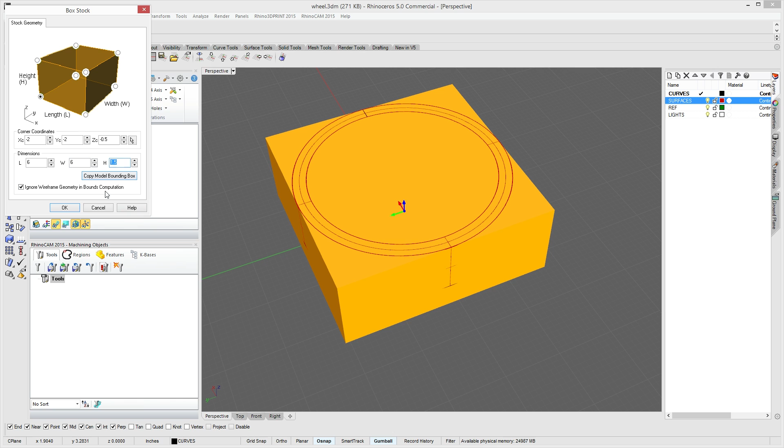So we'll let it go ahead and pick the 0 coordinate. But we're going to set our dimensions. We're going to add an inch on all sides. So we set this to 6, and we're going to add 6 here as well. And our height, since we want to make sure we do some facing operations, we're going to set this to 2 as well. So if I go ahead and hit OK, turn my stock back on, and you can see that it's significantly bigger than the part. But we can go ahead and fix that.

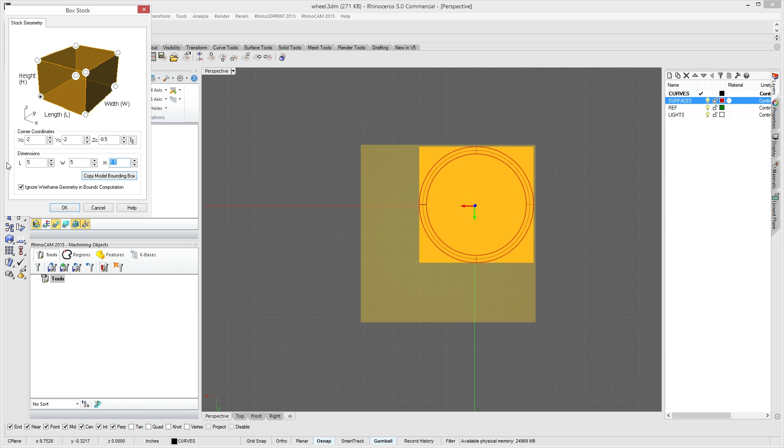Come back in here to stock. Copy model bounding box gets us back down to 4 there. And let's go ahead and just change this to 5, 5, and 2. And you can see that gives us a little bit smaller. That way we don't need as much big stock in the real world. You wouldn't waste that much stock for a part like this.

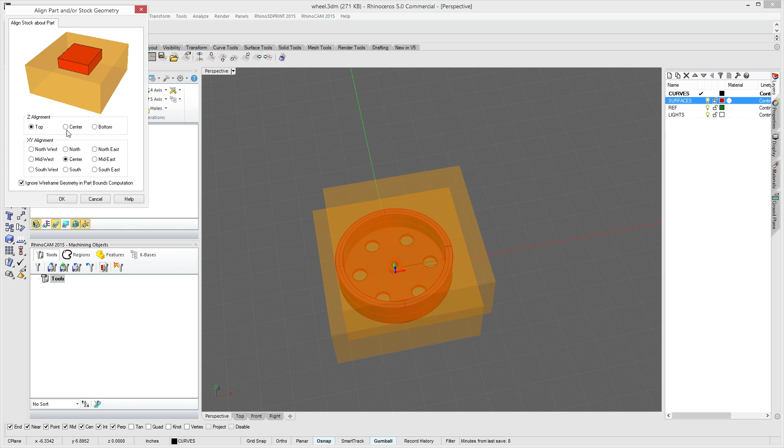So let's go ahead and align them. I'm going to go up here to align stock. And our Z alignment is going to be centered. And you can see this in here that we want it centered. That way our part is sitting right in the middle in our Z. And our XY is also going to be centered as well. So let's go ahead and hit OK. And you can see that looks pretty good with an even distribution around the outside as well as vertically.

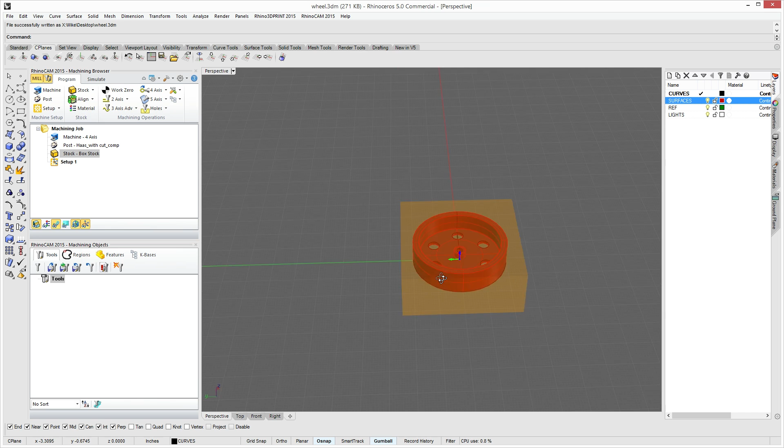Next, we want to align our stock to our 0. And in my vise, typically I zero top left right up here. Obviously your hard jaw's on the back, and I always do that left corner there for whatever reason. So let's go ahead and set our world. We're going to do set to stock box.

And what we're going to do now for our Z is we're going to set lowest Z. That way I can go ahead in the machine, touch off on the bottom of the vise, add the value of the parallels to it, and when we flip it, we have the exact same Z as well. So I'm going to set this to lowest Z, and it's already set to northwest, which is correct. So we're going to hit OK. Moves everything kind of to where it needs to be. Cool.

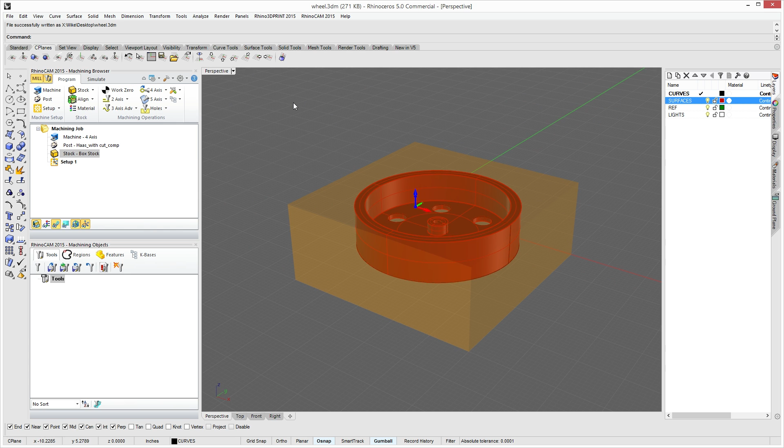So first, I like to kind of keep things organized, so I'm going to go ahead and change the setup here to op1. I'll put dash top because that is going to be our top operation here. So first thing I want to do is face the block down all the way down to this circle here. And we're going to leave it a little strong because we want the part to drop out. So we're going to face only what we need.

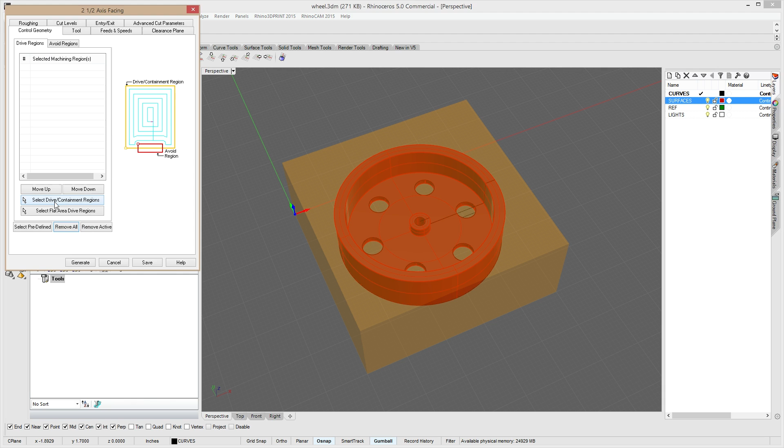So let's go ahead and do 2 axis. And we're going to do facing. We're going to select our drive containment region. I'm going to pick this outer ring right here, that poly surface edge, and right click.

For the tool, let's go ahead and create a tool. We're going to do an end mill, and we're going to do it with a 5/8 inch end mill. Set our diameter.

For all intensive purposes right now this doesn't matter, but we'll go ahead and put some information in here as well, and we'll leave it at tool number 1. We're going to work with aluminum right now, so I'm going to use my 3-flute end mills, turn my coolant on, jump over to feeds and speeds, load from file, change this to aluminum 6061, carbide end mill.

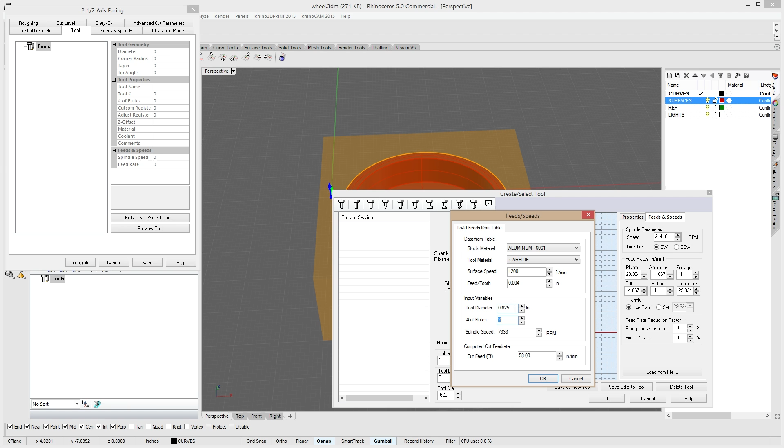Surface speed is usually pretty generous in the defaults, so I'm going to drop this down to 1200, and we're going to leave the feed per tooth at 4 thousandths right now. Make sure we change our tool diameter and our flutes. We're going to go ahead and leave everything else the same. Save as new tool.

Feeds and speeds, make sure everything looks good. Clearance plane looks good. All right, roughing. We're going to go ahead and leave tolerance and stock alone because we're just facing. Tool diameter, we're going to change this to 50%.

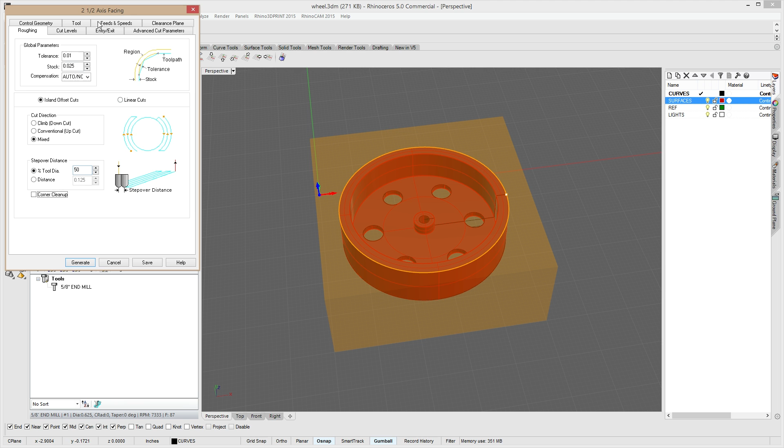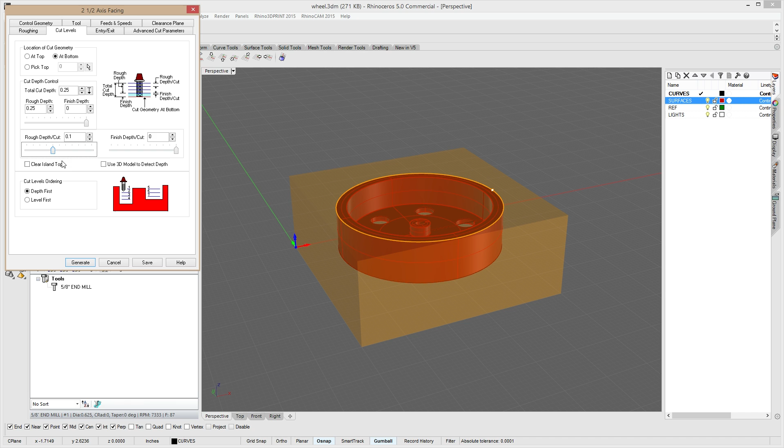Cut levels: since this circle is at the bottom of where we want to be, we're going to change this to bottom. And because we have a 1/4 inch on top and on bottom, we're going to set our total cut depth to 1/4 inch here. And we're going to do a rough depth per cut of, let's do 75 thousandths so we can see this pretty well.

Entry exit, we're going to do along path and nothing on the exit. Advanced cut, we're going to turn on our arc fitting with a 2 tolerance fitting and some smooth connectors.

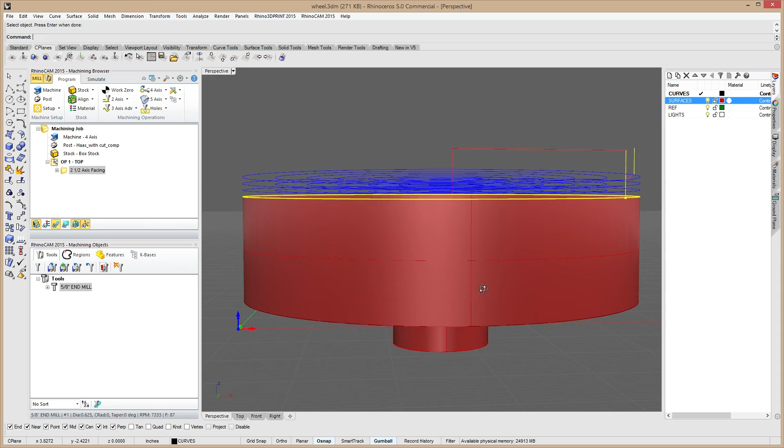Let's hit generate. You can see it went in and it's going to face all this off in the middle here. As you can see, the entry right there is going to come down nicely into the part. So if we go ahead and simulate this, you can see what it'll look like.

There's not a whole lot to take off at each pass, so we can speed this up. And it's going to take it down exactly where we need it to go in about 5 steps—4 steps, it looks like. So cool.

All right, back at it here. I'm going to turn off the tool path for now so we can see a little better. The next thing we're going to do is go ahead and pocket out this inside here, removing all the material from there. So we're going to do now 2 1/2 axis pocketing.

Select. I'm going to click that, the inside surface edge there, to give us that ring. And actually, we're going to do this a little different—let's select the top one here, since we know we've already faced down to there.

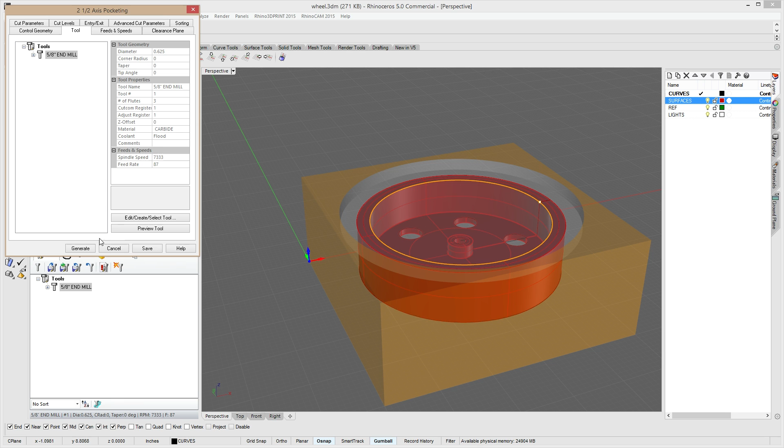Right click, tool. I'm going to do it again with our 5/8 end mill. Oops, I jumped through to feeds and speeds. That's good. Clearance is good. Cut parameters—now is where we want to get a little more

tighter. We're not going to do any finishing, so we're going to leave 0 stock. When I leave 0 stock, I want to make sure my tolerance is 1/1000th. And we're going to do 50% step over again.

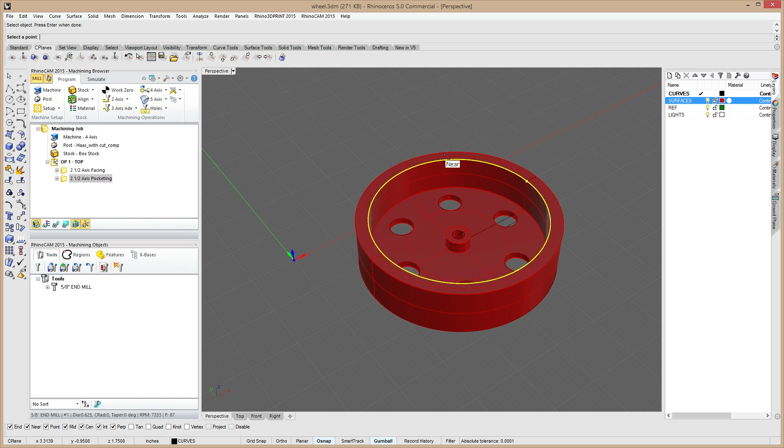Our cut levels now: cut levels, this line is at the top. So our depth control, I'm going to go ahead and select this, pick a point on the top circle, on the bottom circle, and it gives us 3/4 of an inch depth, which is correct. And our rough depth per cut, we're going to do about, again, 75 thousandths per cut.

Entry, this time we're going to helix in. Advanced cut, we're going to make sure we turn on our arc fitting and smooth cut connectors, and we don't need to worry about sorting for right now.

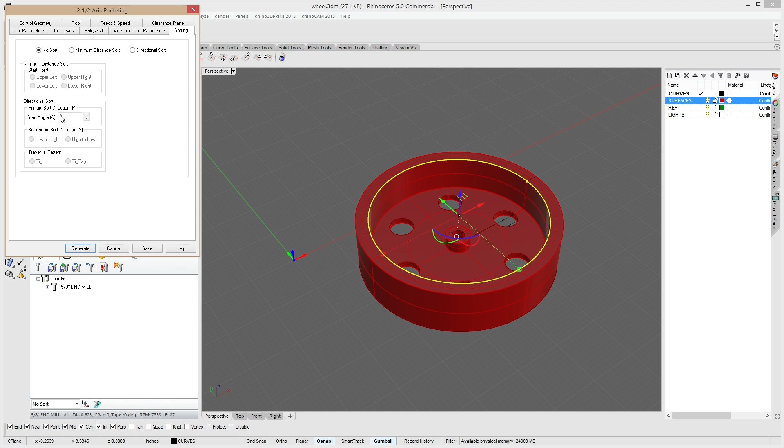So if we generate and take a look at the tool path, it looks pretty good, except it's going to take that nub right off in the middle.

What we did was we forgot to select that line in there as well. So let's go ahead and go back into here, and under drive region, I'm going to choose that line as well.

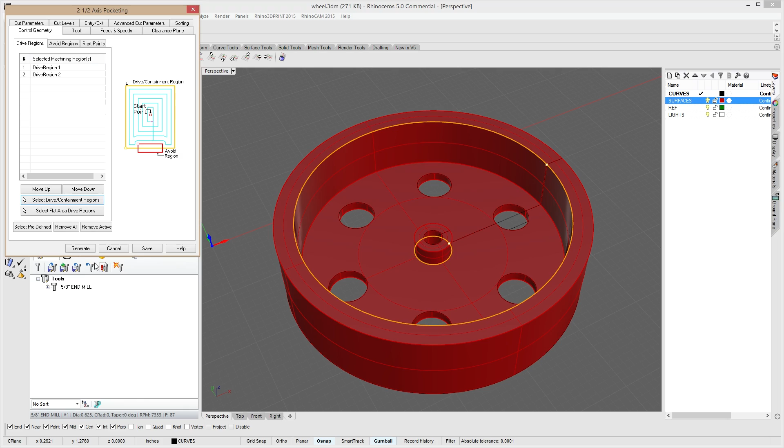See, now it picked all of them. So let's remove all, select that, and select that line. Generate. Oh, still having a problem. The reason is they're on two different Z levels right here.

So we have two options. We can come in and put an avoid there, but since we're using this top surface, probably the easiest way is to do a quick dupe edge for duplicate edge. I'm going to select that edge, right click, and that gives me a curve for that edge. And what I'm going to do is drag it straight up to the same level as that top line.

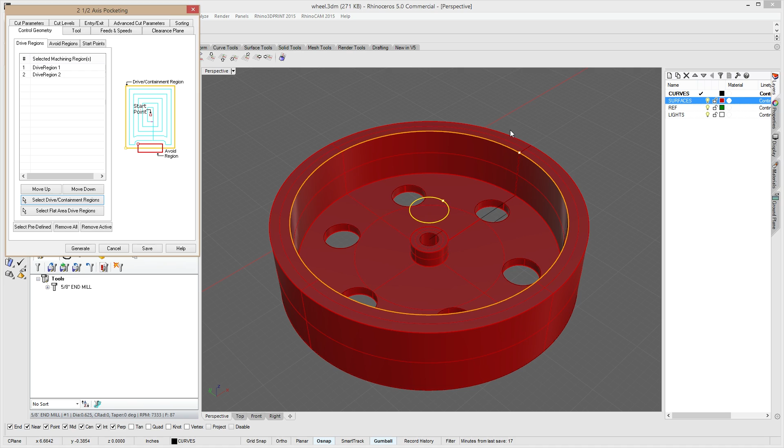Let's go back in and remove all. We're going to select both that edge and this curve, now that they're on the same plane, and generate. And now, perfect. Goes right around that area. So let's see what that looks like in the simulation.

That looks pretty good, other than it's not as close as we want it to be in the center there, and the reason being is our step over tool size. So if we come back in, cut parameters, clean corners, generate, it should come in and do a clean corner operation on that as well.

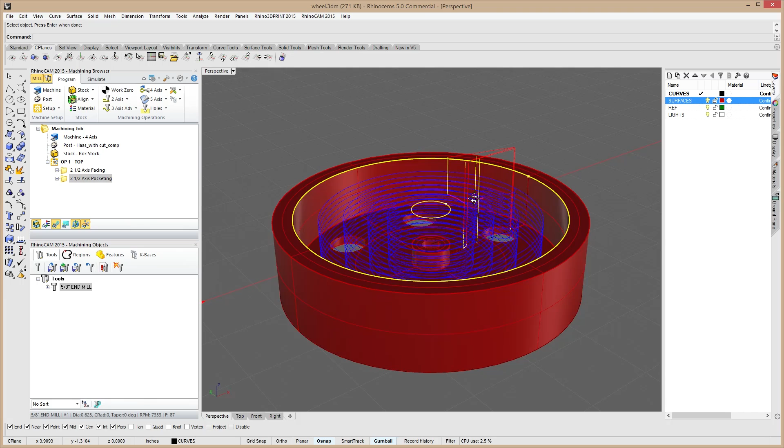Let's go ahead and simulate through it. There we go, got that nice small circle in the middle where we want it to. Cool, so that's looking pretty good.

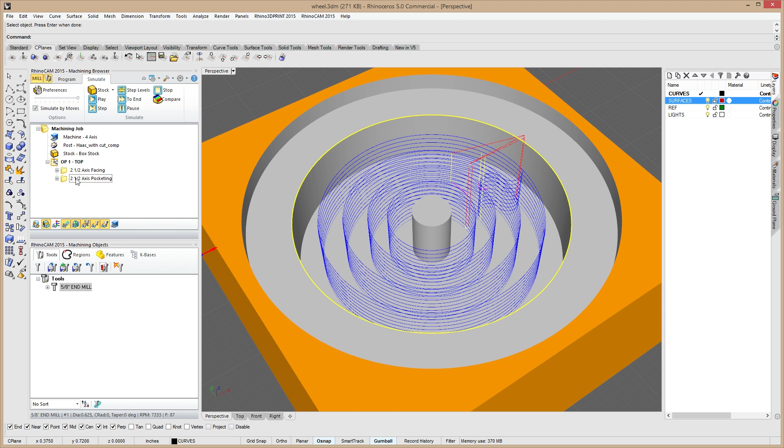Now, next thing we're going to do is face down the pocketing for right there, and that'll be a quick operation to bring this down to that level.

So, 2 1/2 axis facing, select that operation. And actually what we can do, since we already have this circle here, is let's go ahead and choose that same edge we duplicated before. Tool is going to be the same, feeds and speeds are the same. Roughing now can stay at...

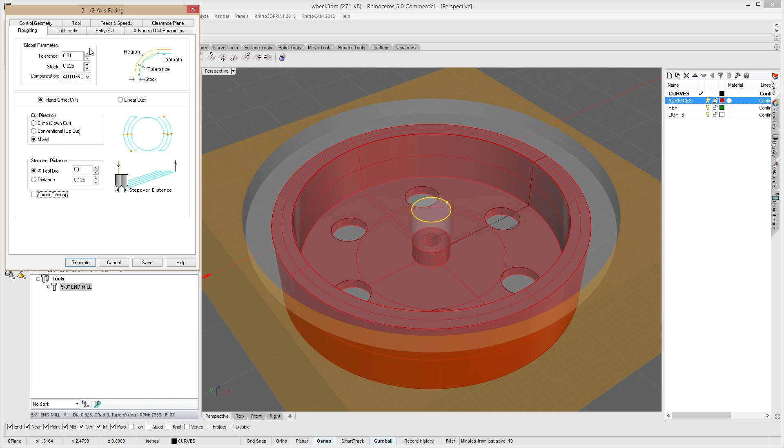the looser tolerance with a little stock. Our cut levels are actually at the top, and our depth is going to be from this top surface here down to this surface right there. Gives us a 1/2 inch, and we're going to do this at 100 thou at a time.

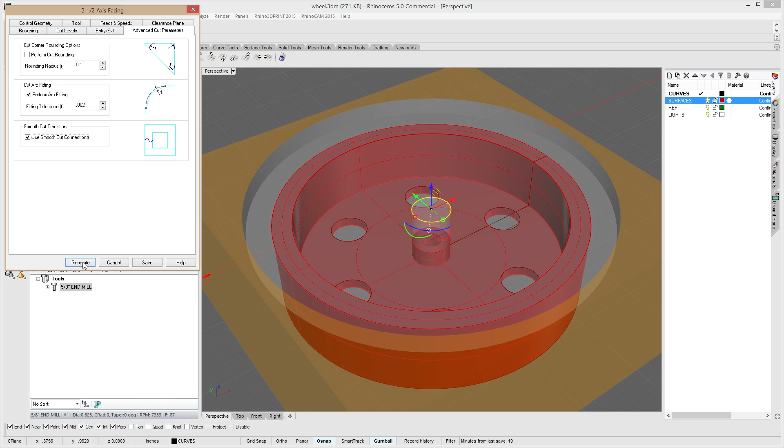And now we can actually do our 2D entry and 2D exit, same thing. Turn on our arc fitting, smooth cut connections, generate, take a look at the toolpath. Pretty much exactly what we need.

Quick simulation. Oh, that's what we should need. Oh, it started at the top, so there we go. That one, this one, and here. Resimulate, takes it down. Turn off the toolpath. Starting to look pretty good right now.

Cool, so now let's go ahead and drill those holes. Now let's check what size I made those holes. So we're going to go to Analyze Diameter.

I already had that selected. Analyze Diameter, put it on that. And those are 1/2 inch circles.

So let's go to Holes, Drill. I'm going to select drill points or circles. And I've got curves and edges there, since the curves I used for doing the wire cut in Rhino are right on that edge. So we're going to go ahead and use the curves that are already there.

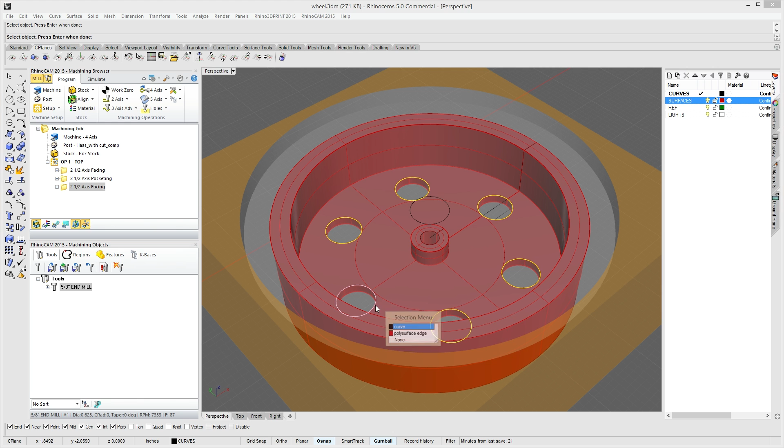Total of 6 holes. Right click, tool. I'm going to use a drill this time, 1/2-inch drill.

Clearance, we've got clearance at the top. Cut parameters, our drill depth, because it's going to be from this hole down through. And so we don't actually need a whole lot of depth right here, as you can see.

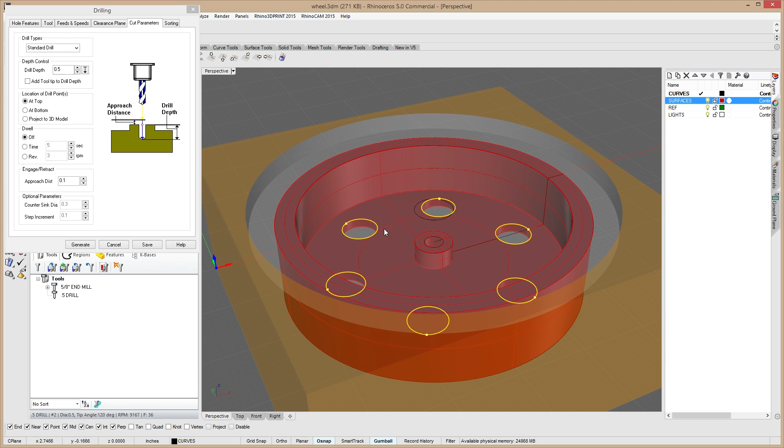So we're actually only going to drill about a 1/2 inch like that. If we want, if we choose top and bottom, the hole actually is only 1/8 of an inch thick. So we could do that and then add tooltip to drill depth, but just to be safe, we're going to go ahead. Why don't we drill 3/8 deep?

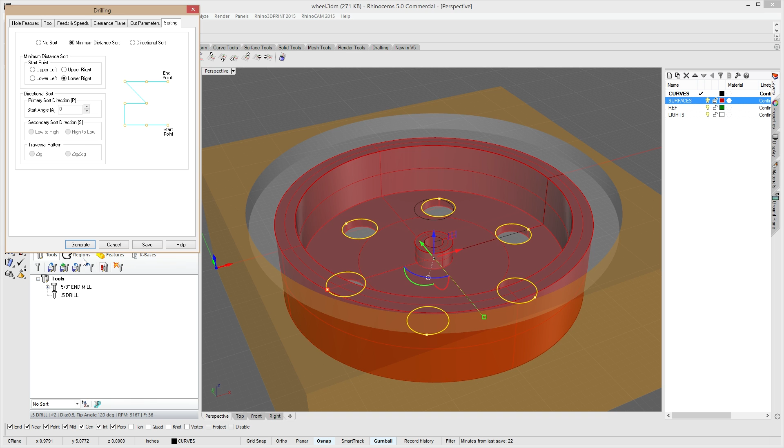Leave everything else the same. Sorting, we'll do minimum distance sort and hit generate. And if we take a look, it just goes right around in a circle. Let's see what that looks like.

And obviously it's not drilling all the way through, but it puts nice holes. If we take a look now, that's pretty much everything we're going to do on this side.

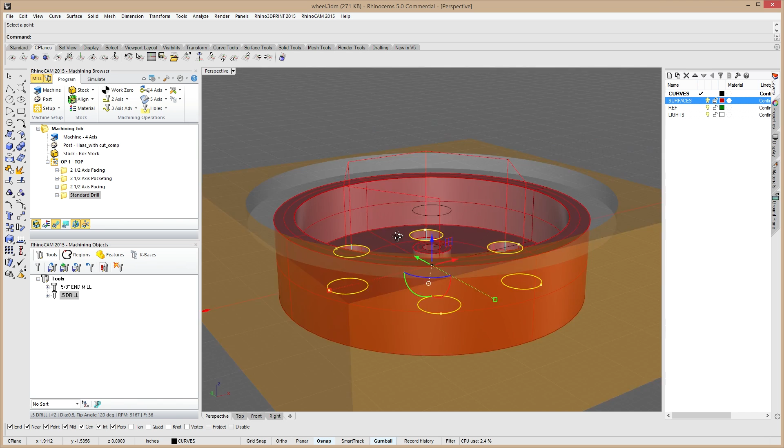Now we could start the profile around the outside. If we take a look at what our distance is of this outer piece from here to there, it's a 1-inch piece, which shouldn't be a problem for a larger end mill. But the issue is we don't have a ton of room, so think of your vise going to be at the top and at the bottom here.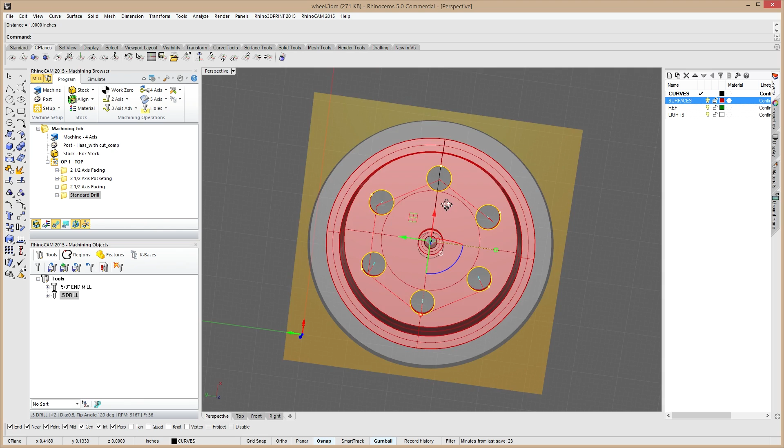So what we're actually going to do is we'll probably end up doing it with a 1/2 inch end mill, which usually won't have enough length of cut. And if we want a real nice finish like that, why don't we start it and go down just a little bit as well.

So if we go ahead and do 2-axis profiling, choose this outer edge tool. Let's go ahead and create a 1/2 inch end mill now. We're going to give ourselves a 1-inch flute length.

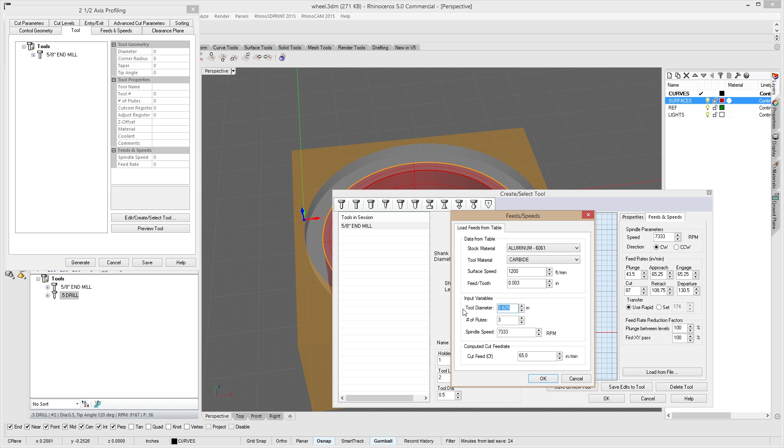Since we changed it here, you can watch what'll happen when I select OK. Load from file. Three flute, everything looks good. Hit OK. Now, if I do save as new tool with tool number 1 in here, it's going to pop up and say tool number is repeated.

Do you want to use a non-repeated tool number? Well, yes, I do. We hit OK. It auto adjusts it to 3, and we're good to go.

Select our 1/2 inch end mill. Check our feeds and speeds. Clearance plane looks good. All right, cut parameters.

Now, right now I'm going to kind of do an easy part here. We're going to just do outside, inside for closed curves. Do outside because we know we want to cut around the outside. And our cut levels are, since this is 1 inch, going to be 1 inch down at this point.

Why don't we go ahead and do, since there's a lip and there's some stuff in the way, we're going to only cut down about 1/2 inch. And we're going to go ahead and do 100 thou at a time.

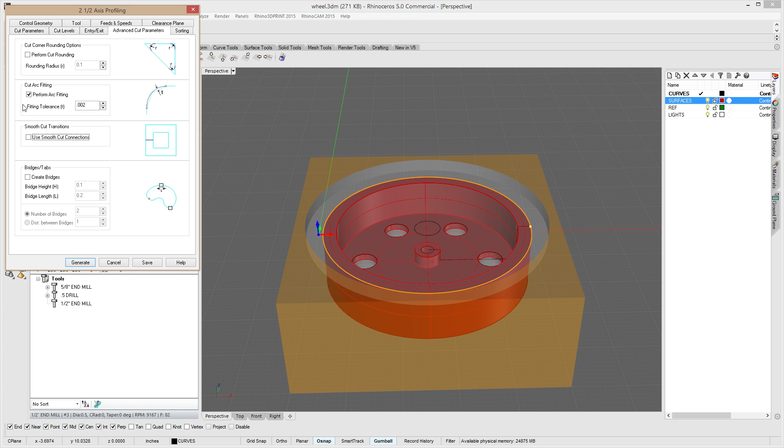So 5 passes around. Our entry exit, I want to do it along the path, and I don't want any exit. Going to do arc fitting, 2 thousandths, and smooth cut connections will not be affected here. So hit generate, and you can see it's just going to cut down just like that.

And what we can do also is set, if we want, the entry and exit to apply at each cut level. And you can see that it'll come back up and down to smoothly go into it each time.

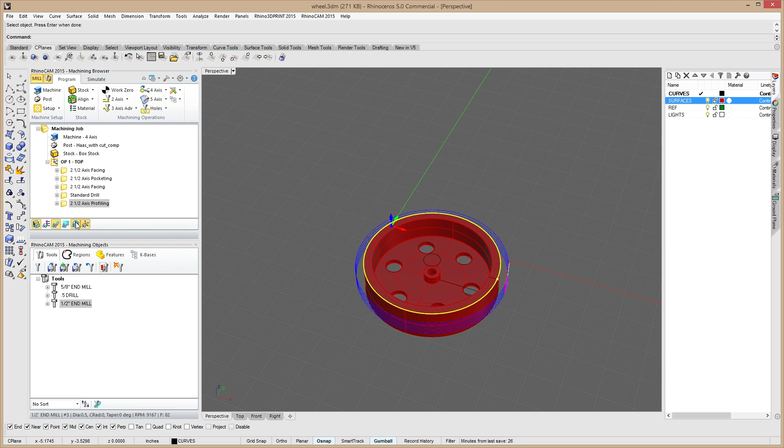So if we simulate that, let's see, it's actually awfully tight top and bottom. So we got two options. We can either make our stock bigger, or we'll just go to a smaller tool.

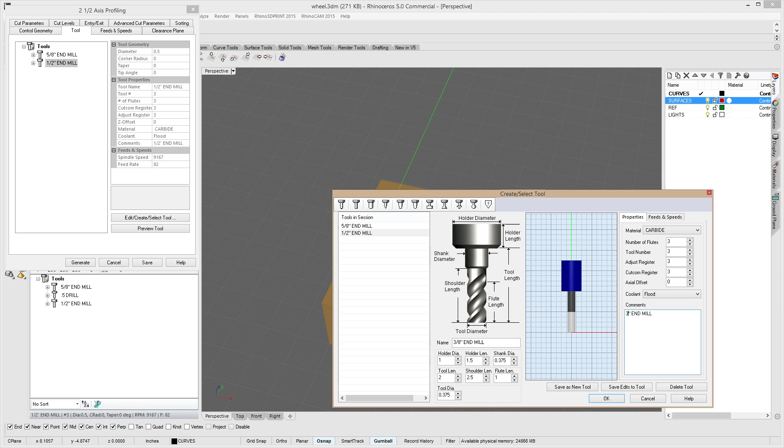So let's go ahead and do a smaller tool. I'm going to go in here, tool, edit tool. Let's go ahead and change this to a 3/8 end mill. We'll adjust our feeds and speeds.

Save edits to tool, and it tells us that we're editing existing tool. Hit OK. Choose our new tool. Make sure we come into feeds and speeds. Hit load from tool so it loads the new feeds and speeds. Hit generate.

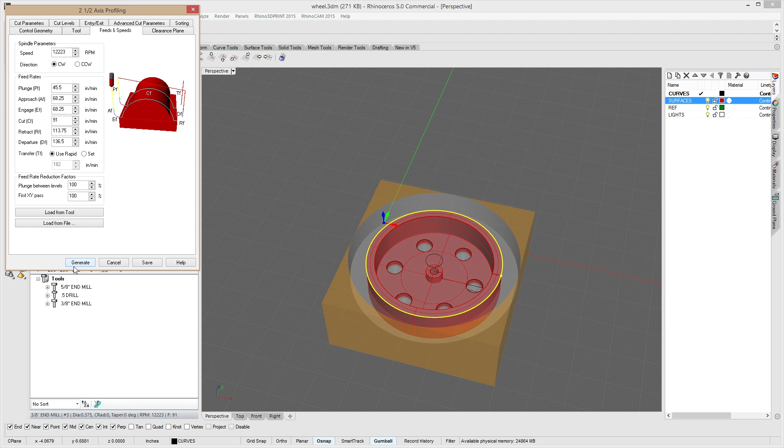Simulate again. There we go. Now there's plenty of meat at all four sides to hold it in place. Cool. So that whole side here is done now.

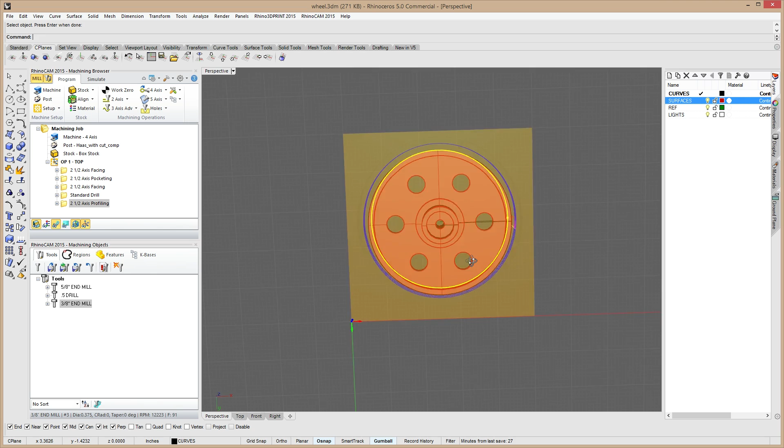We do have a hole in the middle. It's a through hole. We're going to go ahead and drill that from the other side. And you know what? We'll do it from this side.

Why not? Go ahead, holes, drill, select circles. I'm going to select that one. Right click,

tool. Let's check what size tool that is. We'll analyze diameter. Since it was already selected, it shows diameter of 1/4 inch. So we need another tool.

Drill. 1/4 inch drill. Go ahead and just edit this one. Change our feeds and speeds.

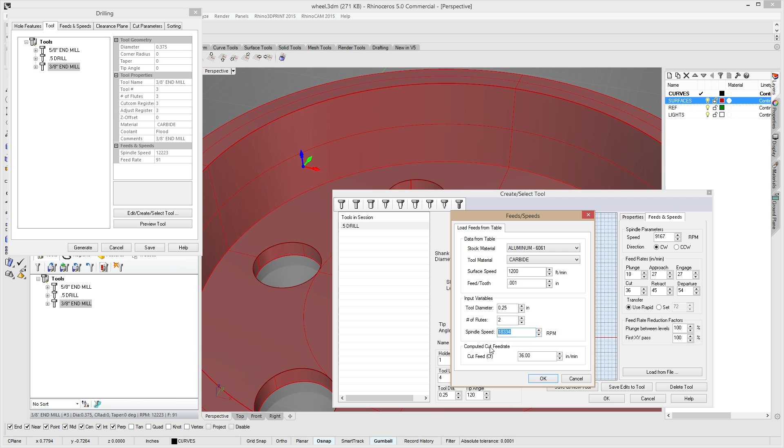And for instance, my CNC machine tops out at 12,000. So we're going to go ahead and put 12,000 in there. Hit OK. Save as new tool. Same thing. Do we want to use a new tool number? Yes. Hit OK. Feeds and speeds, load from tool, clearance, cut parameters.

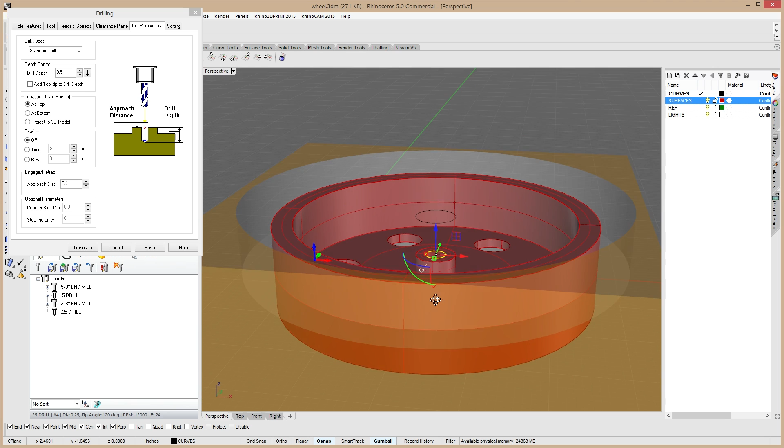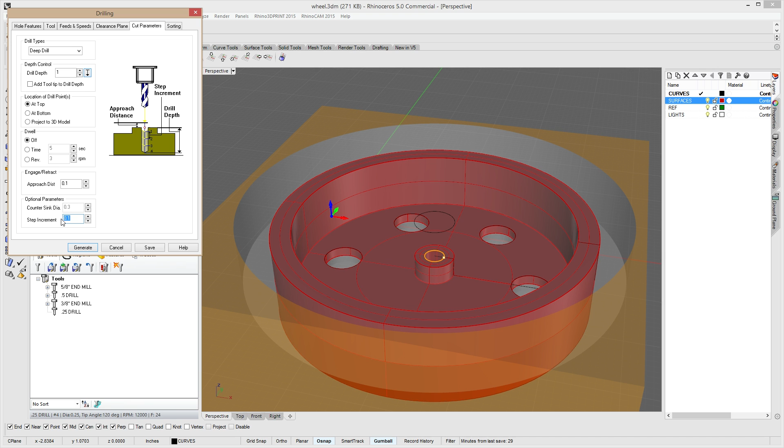Now we have a drill. So drills are typically longer. Let's figure out what our depth is going to be. It's going to go from there down to here. It gives us 3/4 inch, which is fine. So what we're going to do is let's drill a full inch. And we're going to peck drill it. So let's go to deep drill, full inch. We're going to do it in like 1/4 inch drill bit so we can do 2 pecks. Generate. Simulate it. Good to go. Cool. All right, let's flip it.

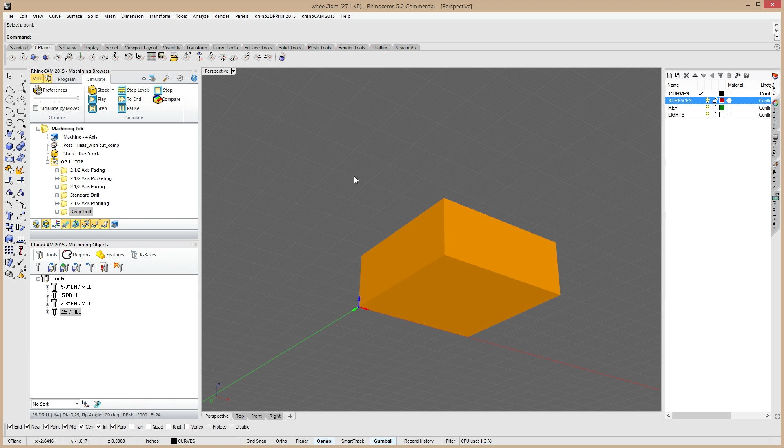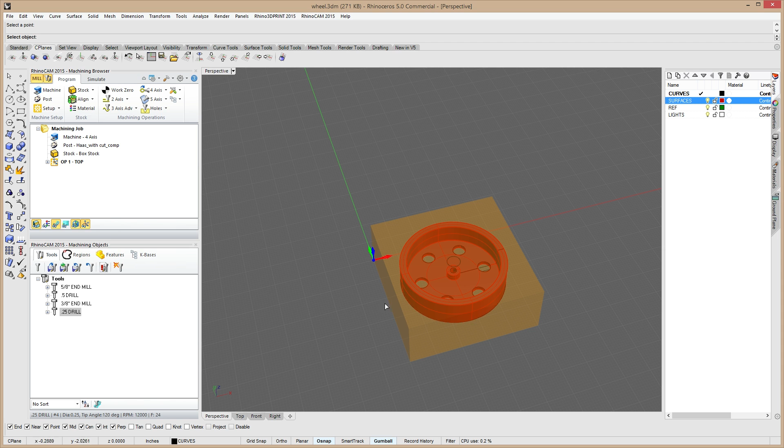So next, we know that we zeroed off this upper left corner. So to make sure that when we flip this block to the other side, that we are touching off the exact same surfaces, that's important. So let's go ahead and we're going to collapse op 1. And I'm going to go ahead and create a new setup. So new CSYS setup. And what we're going to do is I'm going to hit select surface, and this will allow me what surface I want to look at. So I'm going to rotate it all the way around. I'm going to select that surface.

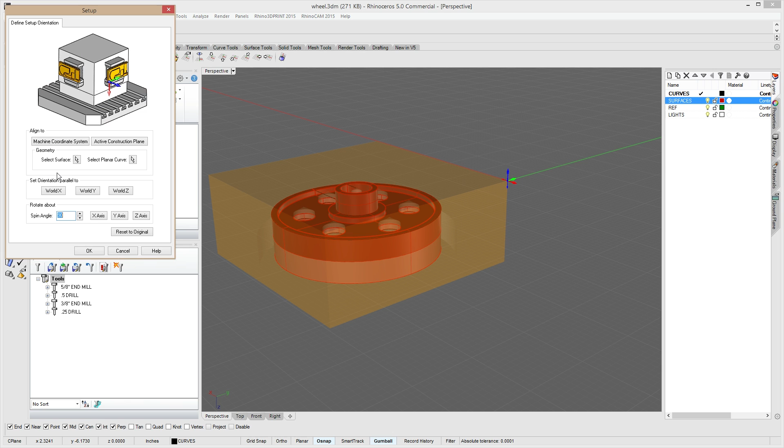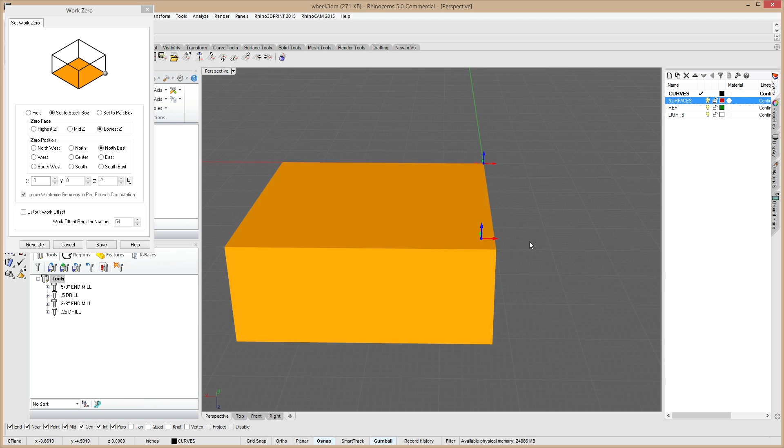And what's important here, like I said, is to make sure we're touching off this exact same corner. Now, this is at the top of it. So technically, we want it to be at the bottom because we're touched off and are zeroed out at the parallels. So we're gonna come in and set work zero. We're gonna set the stock box, and it's gonna be lowest Z. And because we want to be at that corner again, now we're gonna be northeast. That will technically be that same corner that it was up here. And you can see that now it's correct.

So, for instance, for here, let's say this is going to be G54, so we can have it both touched off right in the beginning. Generate. Cool, and that's it. So now we know we're going to be touched off at that exact same point. Let's start adding some machining features. So what we're going to do now is same thing we did before. We're going to face it down to that surface.

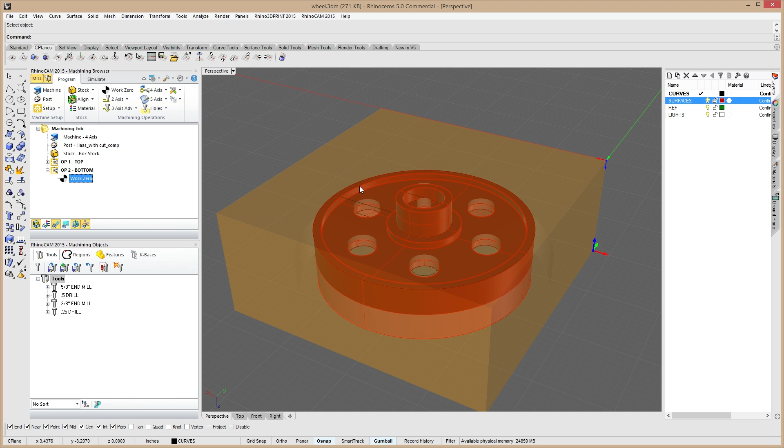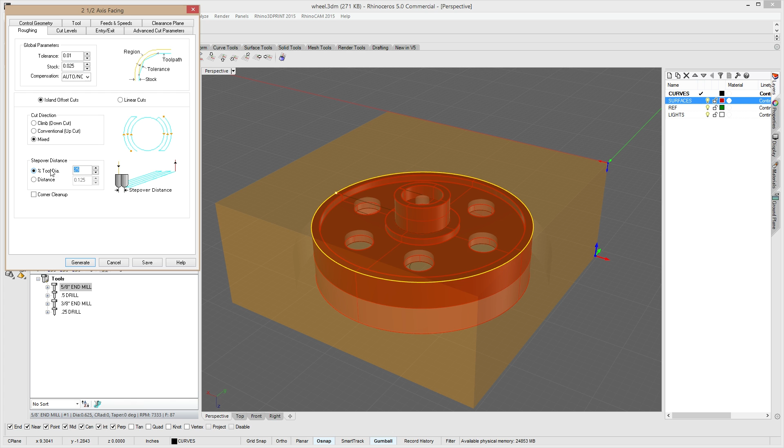So 2 1/2 axis facing, select region, select this here. We have a curve here, probably the curve I used to create it. I'm going to right click, tool. We're going to use that 5/8 end mill again. Feeds and speeds should load automatically. Clearance plane is now on the correct surface side for where we are. And the roughing can stay the same. The tool diameter, we're going to do 50%. Cut levels, we're at the bottom.

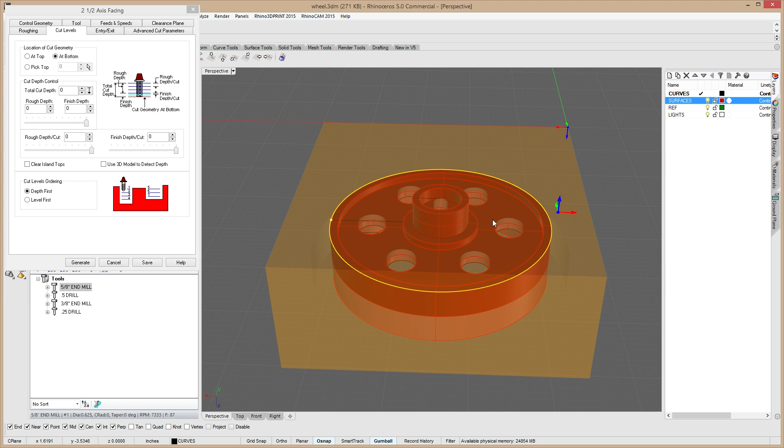And it looks like, why don't we go ahead and we're going to pick the smaller one first. I'll give you an idea of that because that's going to pose... We're going to have to do this down in steps, which isn't a big deal at all. So, first thing we want to do is face it. Actually, we'll just use this one here. So let's face this. Our cut depth is going to be, think with me here. We're going to be here and it's going to be above there. So we're going to go ahead and do total cut depth of 1/2 inch. And we're going to do 100 thou entry exit. It's going to be a long path.

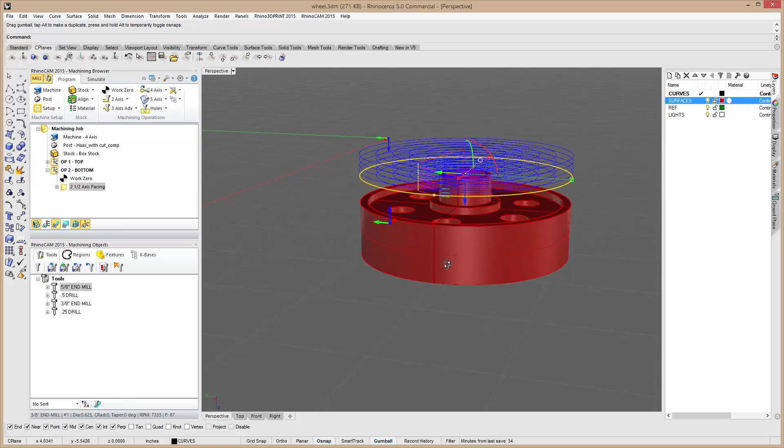Advanced cut parameters, perform arc fitting 002, and smooth cut connectors will be on. Generate. Now, if you take a look, it's basically going to clean everything out, including what we don't want. So how do we fix that? We're going to go ahead and take this curve that we used, and we're going to drag it up to that surface. And if we regenerate, it puts it all above it. So let's do a quick simulation. And you can see we did a little too much here. So we did 2 passes without it even touching.

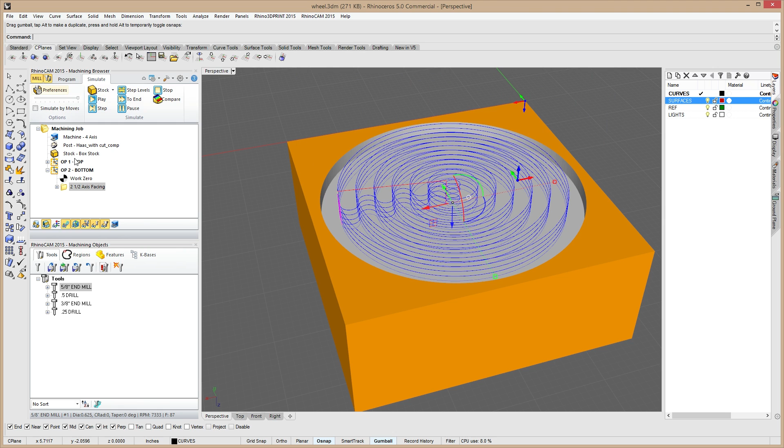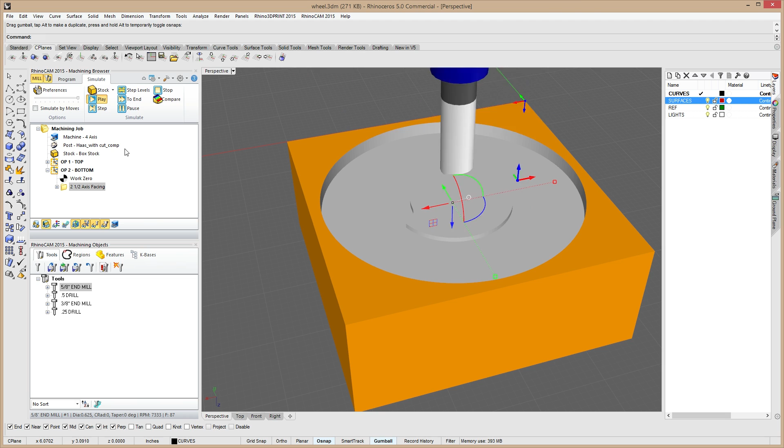Cool. So let's go ahead and jump back in here and alter that real quick. Cut levels. Let's just do generate. Simulate quick again. Yep, we're good to go. Should do it in 3 passes. Cool. All right, so next we're going to go ahead and face the same stuff down.

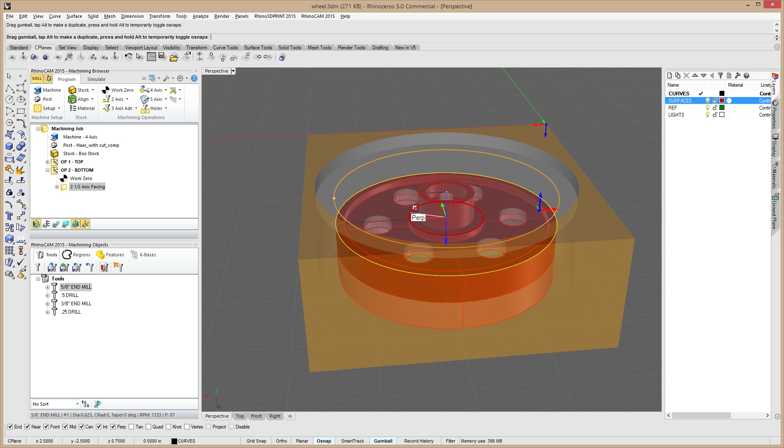Now we're going to face down to this next surface level here. So we're going to duplicate this ring, and I'm going to do a little shortcut here by just holding Alt and grabbing the gumball, releasing it so that I can lock it to there. And now it went down a little low. We actually want it locked into this surface right here. We're okay, which is actually that next surface.

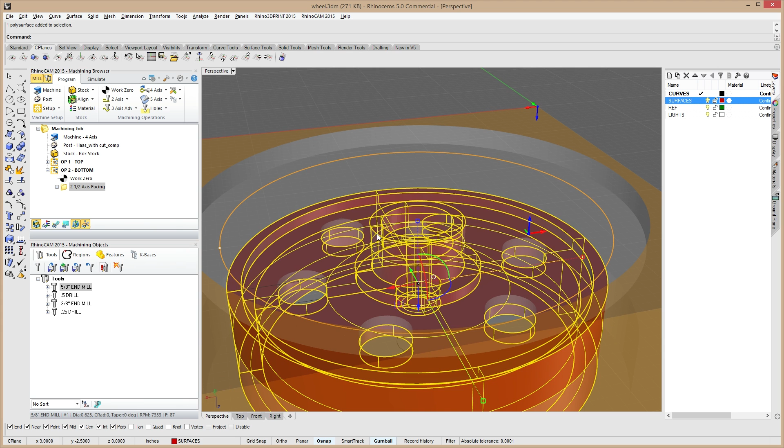So now what we need is this center ring here, which in order to get that, we're going to do a dupe edge. We're going to duplicate this edge right there, right click. Now we got the two edges we need to work with. So we're going to do the same thing. I'm going to grab 2.5 axis facing. I'm going to Control C, Control V, go in, clear these, select my curves. We're going to do this outer curve here, this inner curve there, right click, generate.

Take a look at the toolpath. Looking pretty good. Let's take a look at it. Not bad at all, and it even simulates and shows the holes that come through there. Very cool. I'll make sure we have corner cleanup on there in case it wasn't getting too close. It looked okay to me.

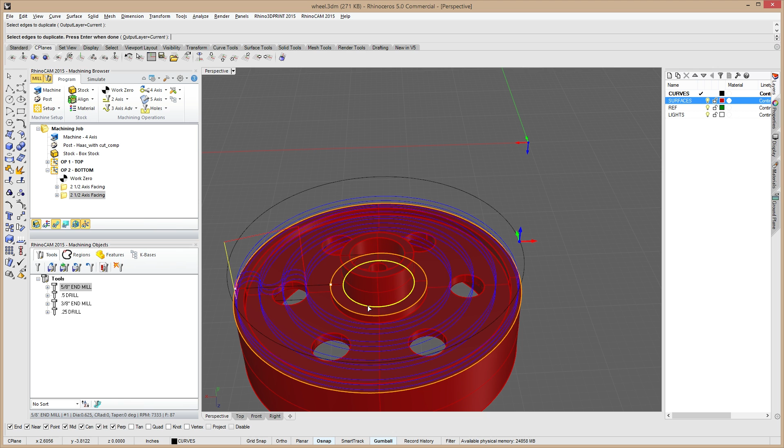Actually, that's why, I picked the wrong curve here. So let's do a dupe edge. We actually wanted that one. I think there is a curve there. Yep. Okay, cool. So go back in here. Let's remove them. I'm going to select that one and this inner one. Right click, generate. See how it moved it in nicely. Cool. So without simulating, let's move on to the next one.

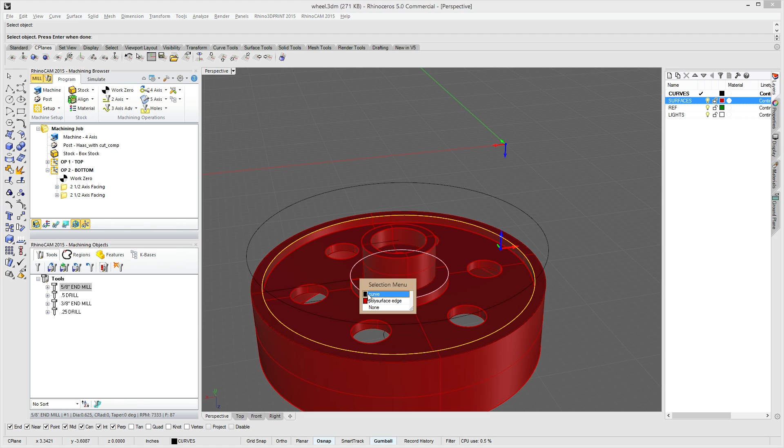The next thing we're going to do is a dupe edge on the inner one and create this pocket. Now we have a line there. We've already got a curve right here. They're at the same plane. Great. Let's do 2.5 axis pocketing. Select our regions for containment, which is going to be that curve and this curve. Right click, tool. We're going to do it with our trusty 5/8.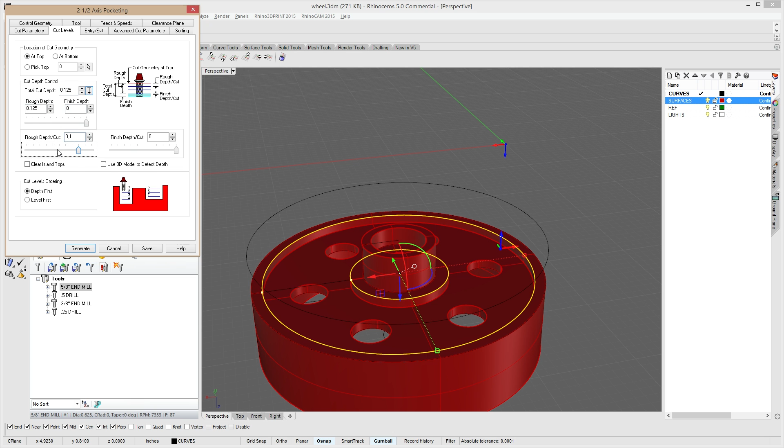Cut parameters now. Our tolerance is going to be 1 thou, 0 stock. Turn on clean corners, 50% tool diameter. Cut levels, we'll go ahead and choose the 2 points that I know we want. Gives us an 1/8 inch down, which is correct. Going to helix in. Going to turn on our arc fitting and smooth cut connectors. And for cut levels, just to be safe, we'll do it in two passes of 1/16 inch apiece. Generate. You can see the toolpath right there.

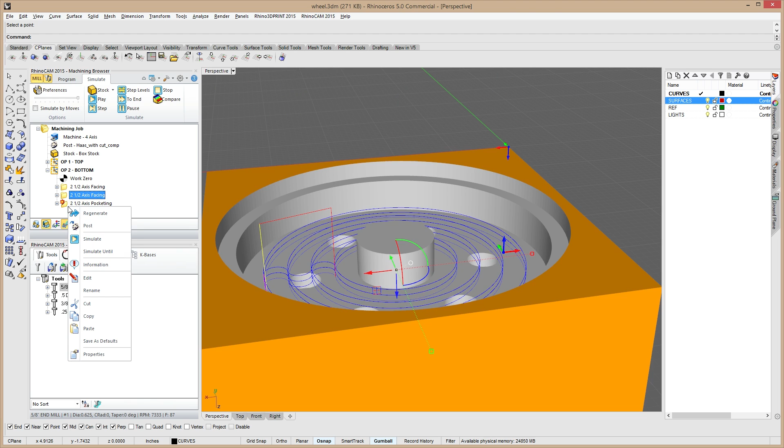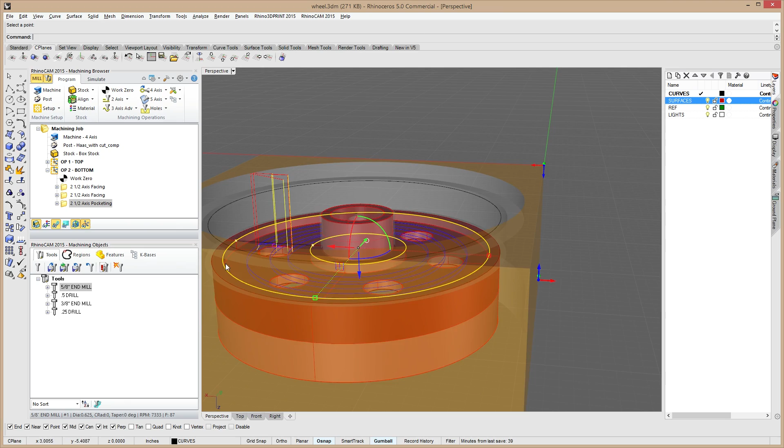Let's go ahead and simulate. We need to watch this one, which is what we had just done. And we'll simulate this one as well. Not bad. And that gives us our little step right there. Now, that pretty much completes this other side here.

We have a little bit of pocketing we want to do on the inside here. So let's go ahead and do that. I'm going to dupe edge, grab this edge here, which actually we don't need to. We can go ahead and do 2 1/2 axis pocketing, select the region. RhinoCAM is nice and lets you select right on the surface edge. Tool, we can do this with our 3/8. Feeds and speeds should be loaded automatically.

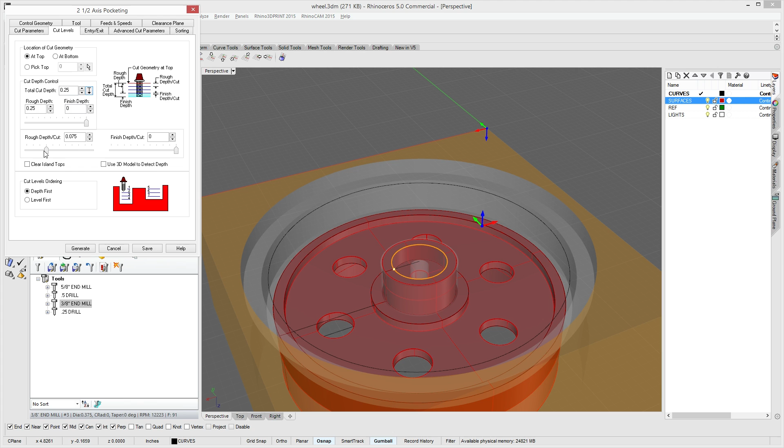Tolerance of 1 thou, stock of 0, step over of 50%. Our cut levels, I'm going to go ahead and pick them. They're down to there. It's 1/4 inch. 75 thou per pass. Helix in. Arc fitting on. Smooth cut connectors on. Generate. We can see it's just going to pocket that right out. Simulate. Cool. So this is looking pretty good now. Looks very much like the part, and we're pretty much ready to cut it out.

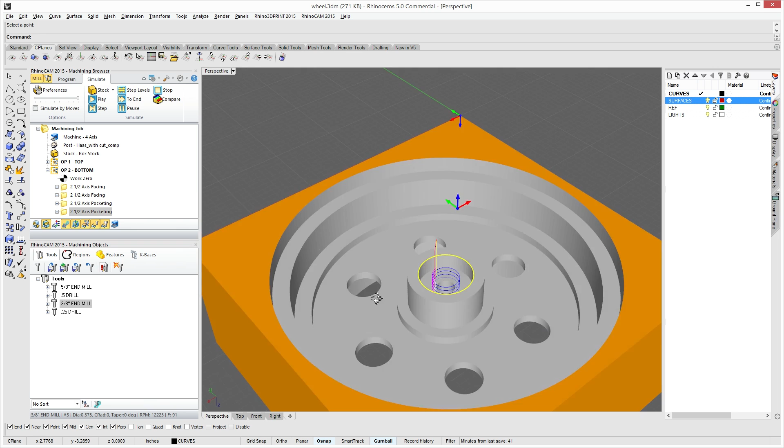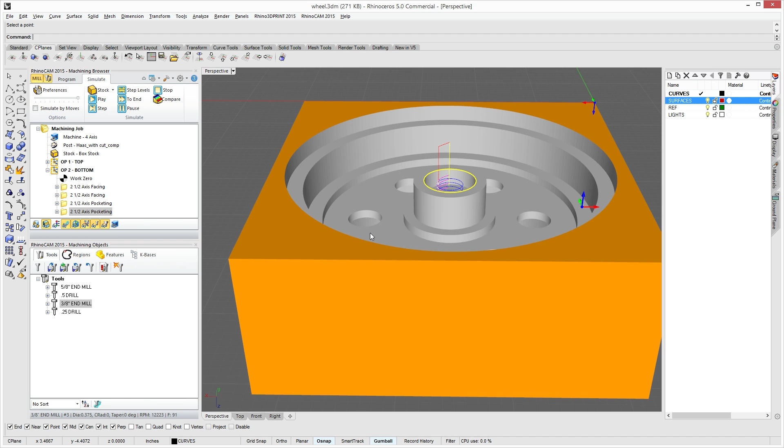Now, I can see one issue right now. We're going to need a pretty long tool to do that. So we have two options. We can create another operation where we flip it back over and it cuts it out from the other side, but the more you move the part, the more chances of error you have. But in this case, we actually need a fairly long tool to cut this last part out.

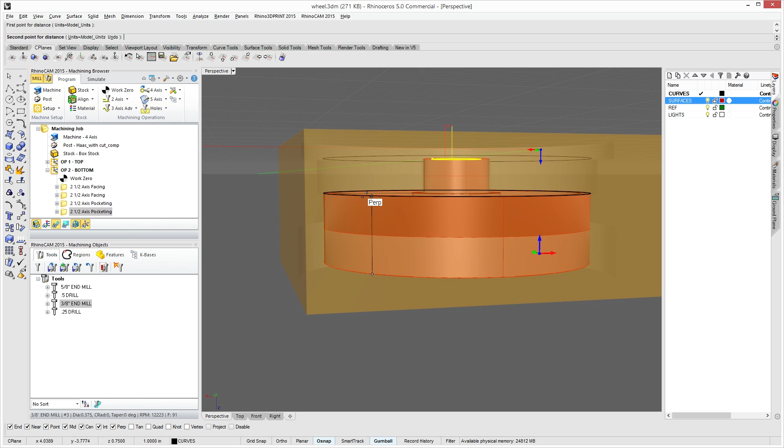If we measure sort of where it is, that's pretty far down. Since our part is, if I measure from there to there, our part is 1 inch from here.

And about a ½ inch more. So about 1.5 inches down. It's only a 1 inch, a ½ inch cut we need to make, but there's a lot of material right here. We actually need a pretty long tool. So let's say we were going to get a tool just to do it this way, so we don't have to flip it again, and that's going to make it a little easier for this tutorial also. So we'll treat it like we have a completely different tool to use.

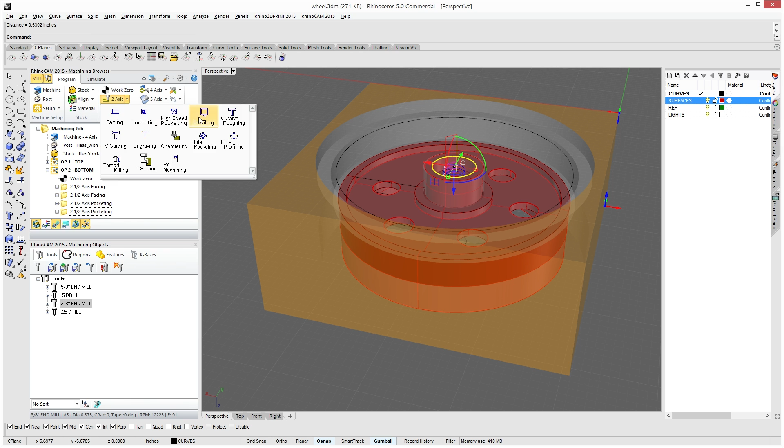2 1/2 axis profiling. And our region is going to be this outer region right here. Right click. Tool. All right, we're going to use the 3/8 end mill, but let's pretend this is a completely different tool that we're going to use to cut this out. So we're going to come in here and call this 3/8 long end mill. And just for accuracy, we're going to say it's a 4-inch tool, and we've got 2 inches length of cut.

We're going to save it as everything else can be the same. Save as new tool. Tool number repeated. We want a new tool number. Hit OK. Select our long end mill. Our cut levels, it is at the top. And our cut depth is going to be, we want to make sure a part falls out. So we're going to do just over. We're going to do 0.55.

And because we want that last piece to sort of come out nicely here, we're going to maybe use bridges here, which would probably work out pretty well. But let's say we're not going to use bridges. Let's do a finished depth of 10 thou, which is going to leave 10 thousandths thickness, and do that in a last pass. So our rough depth per cut, I'm going to make sure we're only doing about, since it's a real long tool, 50 thousandths roughly per cut.

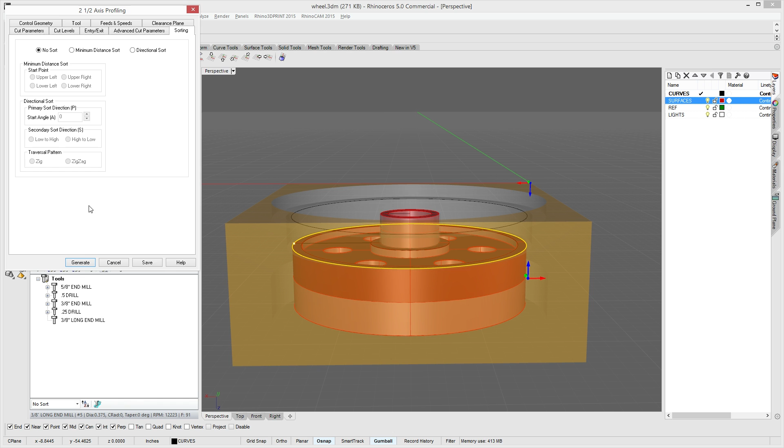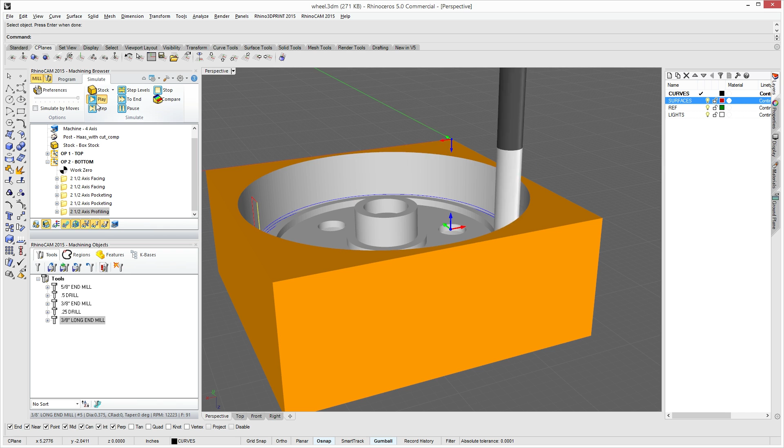And I made a mistake. Didn't choose inside or outside, so let's go back in. Cut parameters, use outside, inside. We want outside, generate. There we go. There's our path. So now if we simulate, it's going to go ahead and clean the rest of that out. There you go. Part at this point would have fallen out. Completely done.

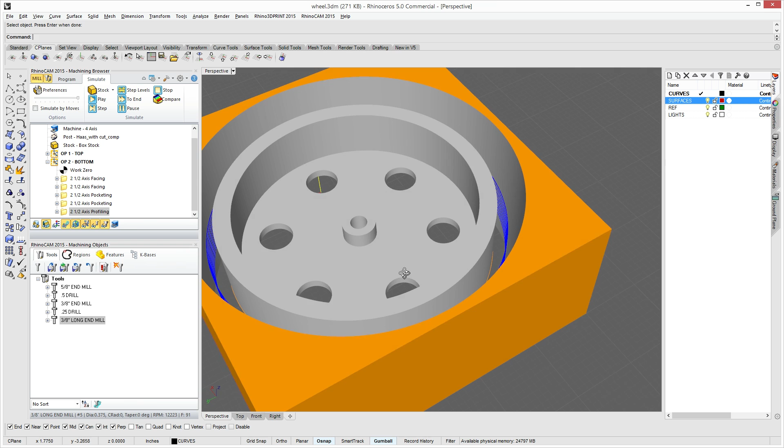And that is quote-unquote flip milling. Basically, a lot of shops will use this. I use it a lot for working on two sides of a part. It's nice to have this square block to sort of zero off of and hold it in place each time. So there you go. Pretty short, easy way to do it. Shouldn't take you long to do stuff like that and set it up. But if you set it up correctly like this, you can make sure you have accurate parts. And you would set this up once and then go run production if you had to make a bunch of these parts.